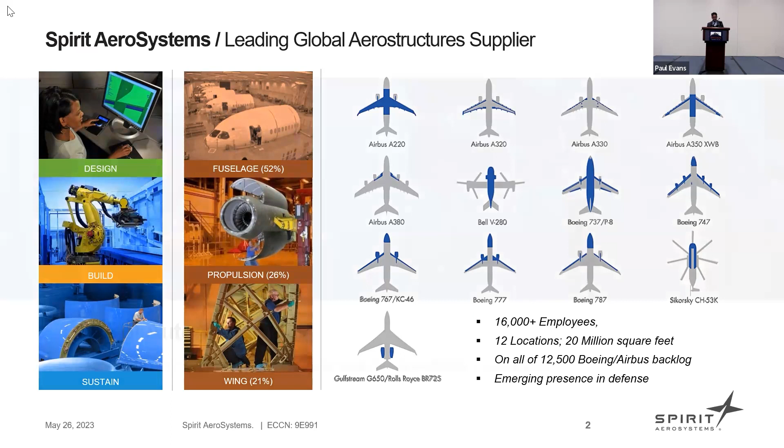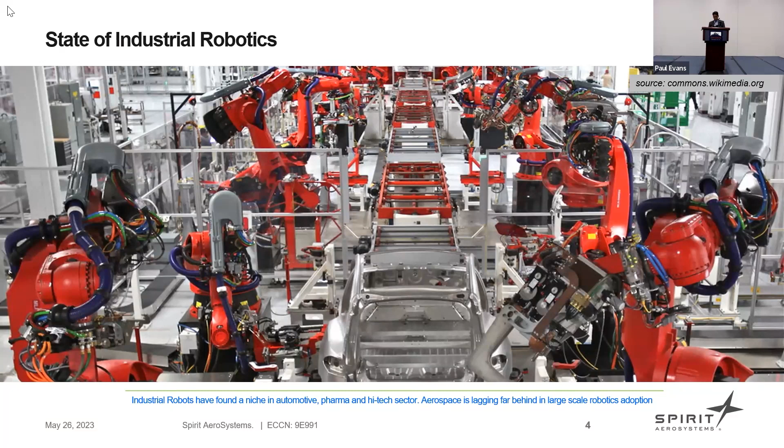So in terms of the state of automation, this is not Spirit. This is, I believe, Tesla. We'd be very happy and content to have our factory floors look like this, but we are not there. If you look at the data in the last 10 years, apparently the robot sales have tripled, and most of the growth has gone into automotive. And in aerospace, we are under the others. And in fact, there's been a negative growth in 2019 and 2020.

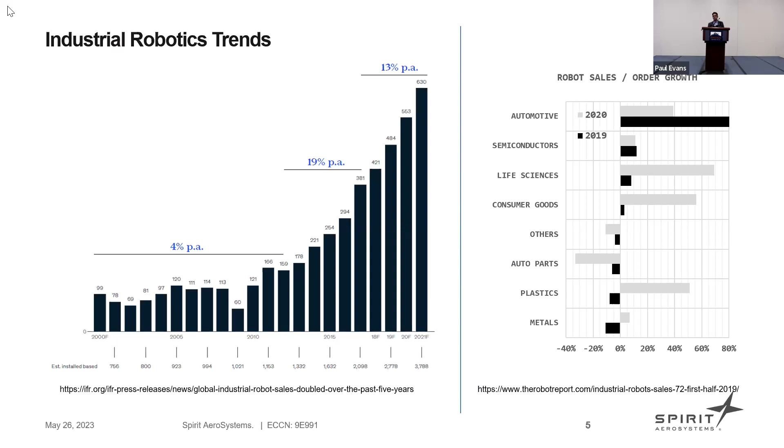So that kind of paints a realistic picture of where we are in terms of automation. And robotics, I think, is kind of a proxy for generally all kinds of automation that we do. If you see these kind of images, you can see that mostly it's all manual operations, and that's what dominates our shop floor.

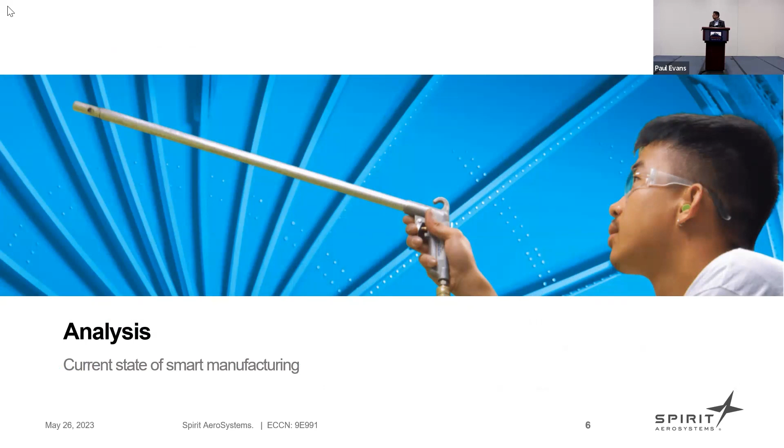We have strong motivation to move and have more automation in our factory floor. For one, we have some unique manufacturing technology and processes, which our competitors cannot replicate. Even sometimes our customers cannot replicate these technologies. We need to be able to continue to retain that leadership. And secondly, coming out of the pandemic, the last 3 years have been really hard on our industry and particularly for our company. So we have very strong motivation to enhance productivity and quality, efficiency all through our factory floor.

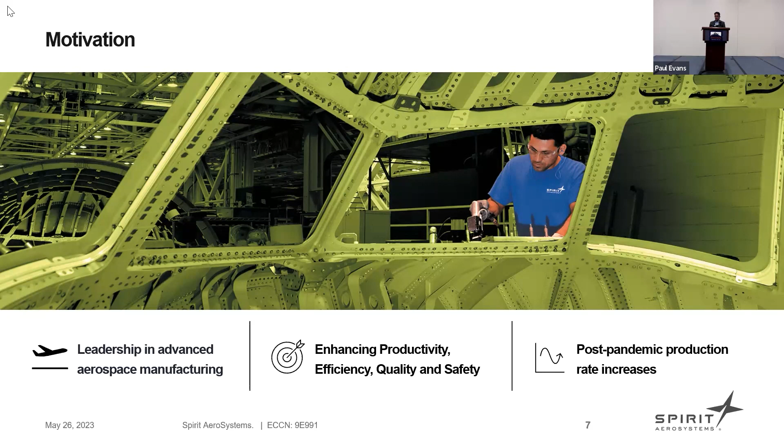And on the other side of things, we are recovering from the challenges of the last 3 years. And now we are looking at growing back to the previous volumes in our production. But not just that, I think we have to exceed that. And pretty soon, in 2 to 3 years, we should be producing more airplanes than we were prior to the pandemic. And I think this time we have to do it differently because we lost some of the capacity that we had during the last 3 years. So automation is really key for us. And I think you heard some of the challenges with Lockheed earlier, similar industry.

So high mix, low volume, it's a big challenge. That's one of the reasons why we cannot justify more automation in our factory floors, because usually we don't have the business case to do that. And then the fragmented ecosystems, I'm sure all of you here are familiar with all the challenges of integrating all these different sensors and robots and working with them. I think we talked about some of it in the workshop today. So those are big challenges, but I think we can work through them. We can't solve the fragmentation problem, but we can design our solutions around it.

And then the third big problem is if you end up designing a solution, and we have done that, you end up with a complex system, and you have the challenge of training your workforce to manage that big complex cell. You need to train your maintenance folks. You need to train the operators to use that. So this becomes a challenge. I think these are big challenges that we see, which are kind of preventing us from going all in on automation.

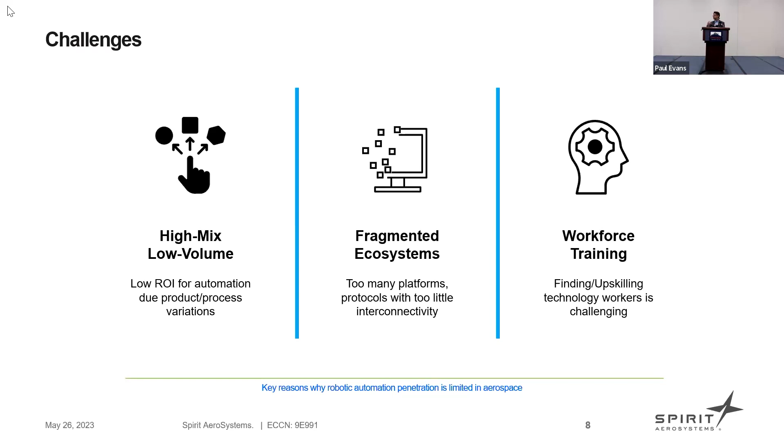And I think one of the important things, we talked about 20 million square feet of space. The scale is of importance. We cannot design point solutions, and we won't ever be able to automate our factory floors like what you saw in the Tesla picture. So in order to get there, whatever we do, we have to do it at scale. And that's what we are attempting to do. So, some deep dive into some of these challenges.

I took an example of one of our first cells that we did. This was an inspection cell. It was in one building, two aircraft, 737 and 767, both are fuselages. And we wanted to develop an inspection cell for fastener head heights.

So we have two fuselages, but each fuselage has a variant. So the CAD is different, the geometry is slightly different, the fastener types are different. So you have all these variations that we have to deal with. And then we started with fasteners, but then quickly we started looking into scratches and dents on the aircraft skin. And that requires different sensors. Some sensors can do multiple jobs. And so we have all this in the mix.

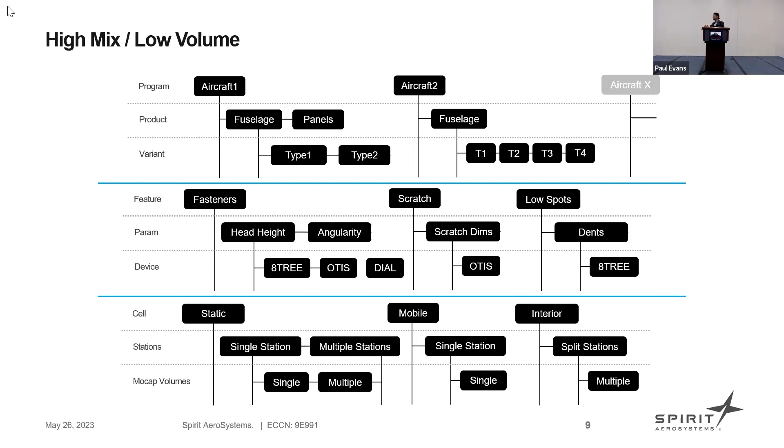And then the challenge is that for 737, we have 14 stations where you need to have the inspection done. On 767, we have 4 stations. So with all this mixed up, whatever application we develop has to satisfy all the conditions. So we have to have one solution which can address all of this, because we don't have a chance to do multiple solutions because of the cost.

In terms of fragmentation, by the end of developing the solution, we ended up with 4 different kinds of sensors. We have motion capture, we have cameras, 3D cameras. We have 3 sensors, one for dents, one for fasteners, one for scratches. And we had to integrate all of this.

And then when we deployed it, based on the feedback from the inspectors and mechanics, the inspectors preferred smart glasses, the heads-up display, because they wanted their hands to be free when they're scanning. And then the mechanics who went in to fix the fasteners, they wanted cell phones. They just went around the airplane looking at cell phones. You'll see some of these videos a little later.

So we ended up having multiple ways to deploy these applications. So we had cell phones, smart glasses, tablets, and a large touch screen. So we had to deal with all of this. The challenge here is that we can do this one time, but we need to be able to scale this, not just in one building. We do this kind of inspection across multiple aircraft programs. So we need to be able to replicate this.

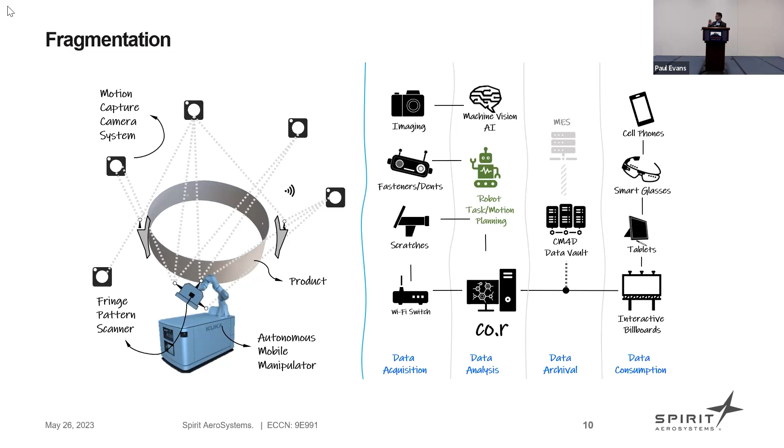So given all that, we came up with this framework called cognitive robotics. At bottom, it's nothing but a set of ROS libraries that we use. And at this point, we have to thank SwRI, ROS-Industrial, for getting Spirit started on this journey. They deployed one of the first ROS-based cells way back in 2015, 16, before my time at Spirit. And Spirit was really ahead of its time in deploying this kind of an advanced perception-based, ROS-based production cell for painting. So we continued that journey, and we wanted to look at how we scale that, because that was one cell, but we wanted to do multiple cells.

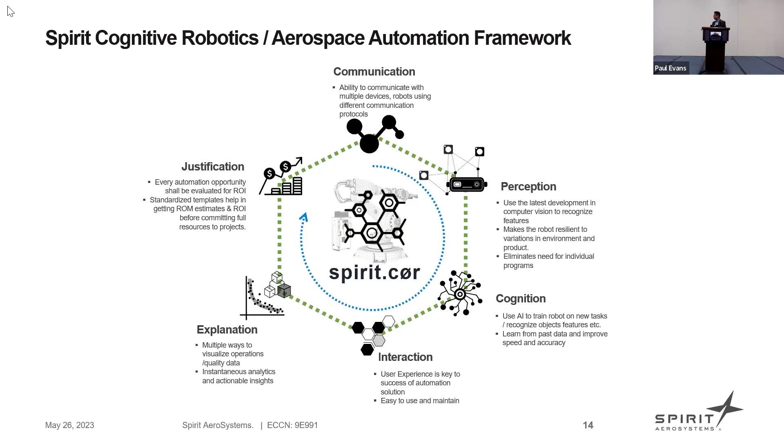So what we are trying to do here is put a strategy around how we develop these modules that we can scale to multiple cells, multiple solutions. Even if it's an inspection application, how do we change parts, change from Boeing programs to Airbus programs, and so on. So this is just the way we think in terms of how we structured our framework.

Communication, it's all ROS. We've settled on it. Any sensor that we have to integrate, if we're lucky, we have drivers. If not, we build our own drivers. Some of the sensors that I was talking about are highly specialized inspection equipment. So they don't even know what ROS is. So we need to build those bridges and then get them onto our platform.

So that's one. And then, as I said, sensors, we have all kinds of different sensors we've been using. Today, we have a library. We made it so simple to integrate new devices into our library that we have a template.

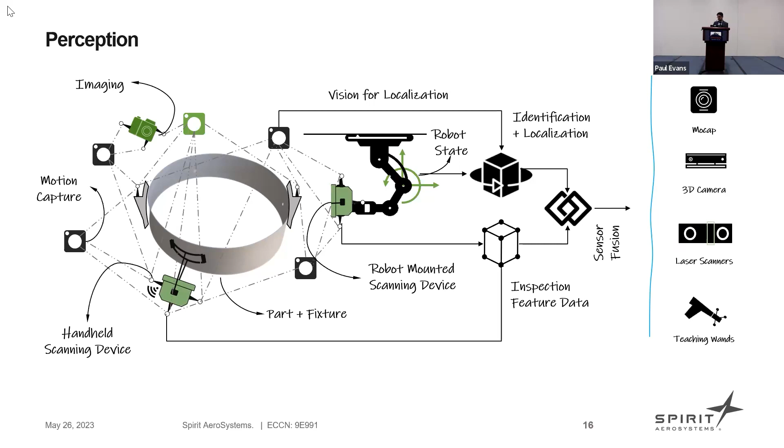So you have a new device. I mean, it requires a bit of work to develop the drivers, but there is a common framework, common message structures that we can use. So that makes it easy to swap things out. If you don't like a certain 3D camera, we can swap it out with other OEMs. So again, that's something that we have built those templates.

And most often we use perception to translate it to some kind of a useful task for the robot. So we have different kinds of applications. Again, within a very narrow aerospace manufacturing domain, we have drilling, sealing, scanning, sanding, imaging kind of applications. So we needed a common messaging format, common data structures to work across these different applications.

So we developed these tools. This is the common data structure across all these applications. We have tested it, and we've been successful in using this. We translate the information that we get from these sensors to these tasks, which we can feed to the robot. And I'll show you different examples of different kinds of robotic applications which use all the same framework, same modules, same data structures to do that.

And one of the key parts of developing an autonomous system is the ability for the robot to make its decisions and make it autonomous. We heard some important information about behavior trees. Looks like that's really popular. I mean, of course, we use control logic, state machines, but they don't really scale well. Behavior trees seem to be really popular.

I did try looking into behavior trees, but I found the symbolic AI tools, like there is a paper called STRIPS back in the 1970s from Stanford. Not sure why that is not more popular than behavior trees, but it's a really simple architecture. So what we use is based on actions. If you have an action, the action has certain prerequisites and it has a certain effect. And that's all you need to know.

But I think probably it's all moot now. I think in 2 years, probably we'll be looking at large language models trying to do this for us. We already heard that MoveIt is trying to do this.

So in terms of interaction, this is really critical for us. One of the challenges of these complex robotics applications is the end user. We can't expect to have engineers operate these cells. We don't have a business case to justify that. We need to have mechanics, the same mechanic who's using his manual inspection processes, to use this instead.

So when we deploy this, we can't have a lot of training and education for those operators. So it has to be really simple for them to use. One of the ways we measure success is by the amount of time the operator spends in front of the computer. So we need to minimize that as much as possible.

And the way we try to do that is give them a very user-friendly interface, something that they like to use and they don't complain a lot about. And they even wanted light theme, dark theme, so we gave them that. So I think it's really critical for them to like this, for them to use it and give good feedback to their managers so that this will see a long life on the shop floor.

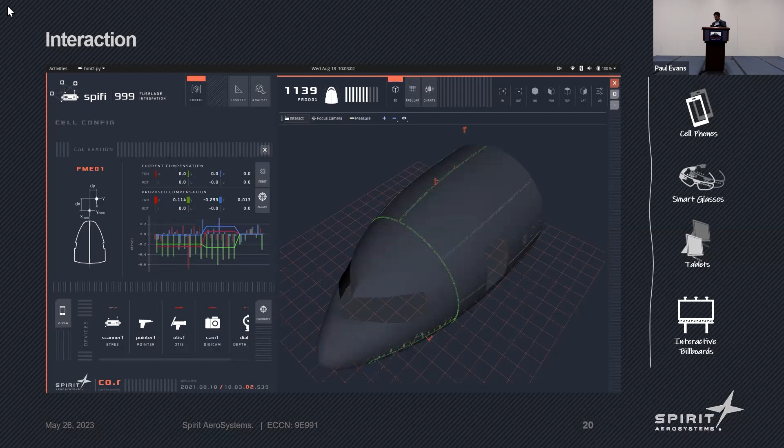So the next level of challenge is, once we convince the mechanics, we need to convince their bosses that there is value in deploying these. And that's why we have all this charting ability, so that the managers get some value out of these tools. So these charting libraries are common across all our applications.

And the whole HMI that you see here, we have multiple applications that use the same HMI. It was really challenging to achieve that, but we've been able to modularize our applications, whether with a robot or without a robot. We have the same HMI working across different applications.

So we have all the charting abilities which can work across various applications. The data structures are common. You can configure these charts in a config file, and then you'll be good to go on a new application.

And the last set of people we have to convince that these solutions are useful, which is kind of easy in a way because we can just show by numbers, is our finance teams. What we have done is we have developed Excel templates for each cell that we develop. We have an Excel template for calculating ROI and payback periods.

So even before we start proposing or designing a new cell, we start collecting some information about the CAD, the kind of part that we work with, and then we use that to build this information, looking at the current effort being spent, the labor effort, the current state, and then the new investment in terms of capital and recurring investments. So we build this, and then this Excel template throws up all the numbers that the finance team is interested in.

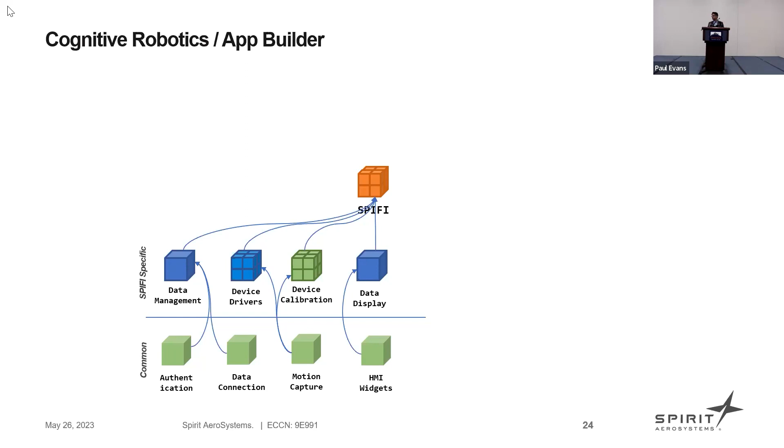We can inspect fasteners, dents, scratches. We have about 7 or 8 different devices that we use, and we combine all this data that we can consume. But this is an application by itself. So when we decide to deploy this, for example in this case the 767 airplane, we need to configure this to work with a particular product, particular airplane, particular standards. Most of the work at this level is config files. We don't do any more coding at this level. So we deploy this application.

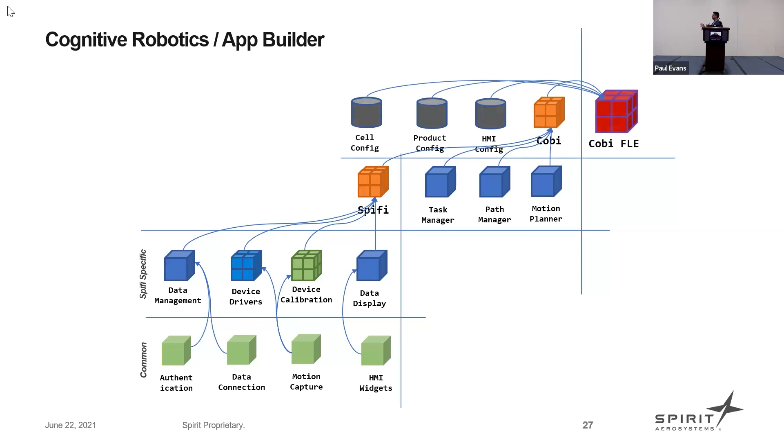We had a situation where we needed to morph this manual inspection cell, which was ROS-based, into a robotic cell. So then we go and add those packages. We use 100% of what we developed for SPIFI, and then we develop this new app with the robot. Again, we configure that to work in a particular cell. FLE is fixed leading edge. So that's how we do it.

So at least on inspection cells, we have gotten to a point where we have promised our end customers, the operations folks, that if you give us the requirements in terms of CAD files and engineering drawings, we'll get back to you with the software completely configured in 3 weeks. The hardware is the long lead time item. Outside of that, we can deploy a new cell in terms of software and configuration in 3 weeks.

And we have shown that. Actually, it takes 2 days to get all the configurations done. Most of those 3 weeks will be chasing all these files and figuring out what's the latest. That's where we spend most of the time. So it is possible to get there.

So just not all talks. I think we have the 737, 767 application that we talked about. It's live. On the 737 cell, we have one of the world's largest motion capture setups with 260 cameras looking at 14 different stations. And we have this inspection cell. I think you'll see the video and probably get an idea of what we do.

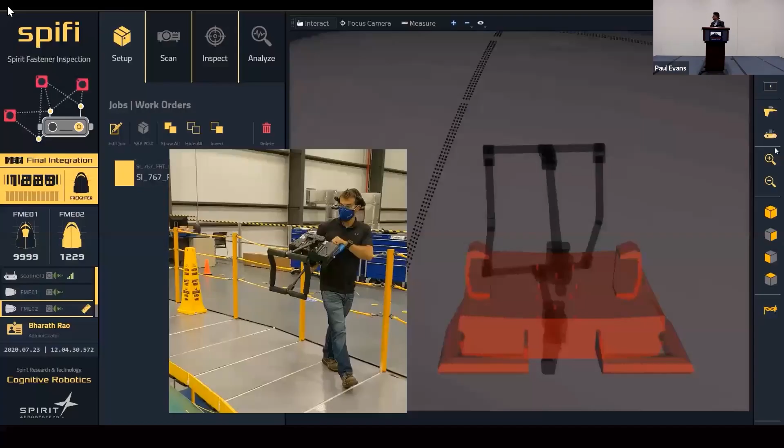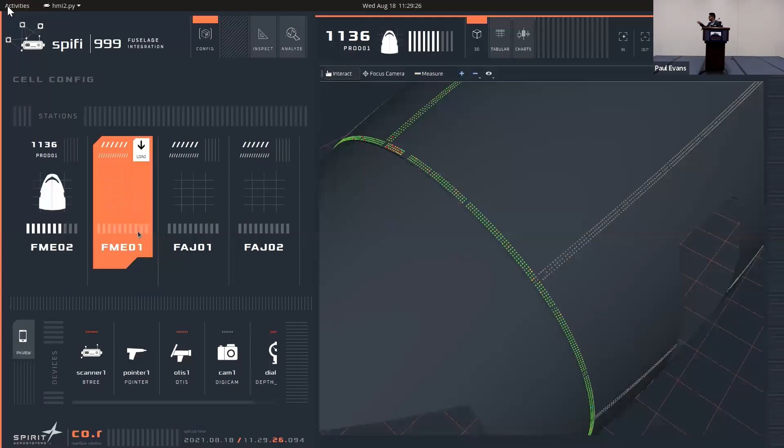So it's called SPIFI, stands for Spirit Fastener Inspection. So that's one of the devices. And there's a heads-up display. The operator looks at it. So it's being tracked by the motion capture cameras. And then this is the software interface the end user sees. Actually, there are only 3 button taps to load a new line unit. Everything else is optional. The mechanic just has to spend 10 seconds in front of the screen and then take the scanner and go.

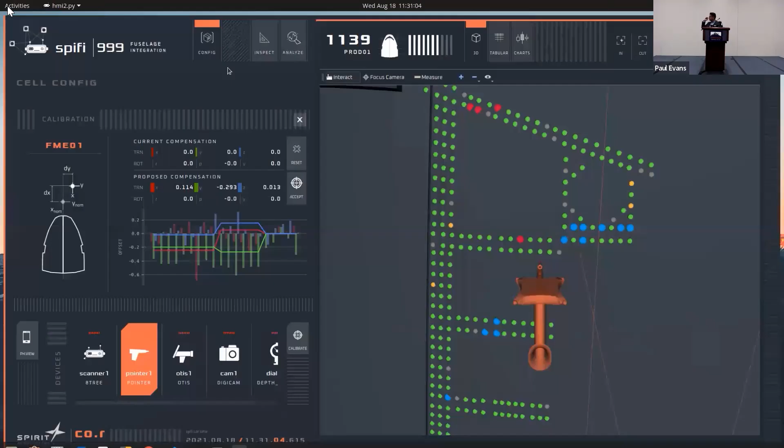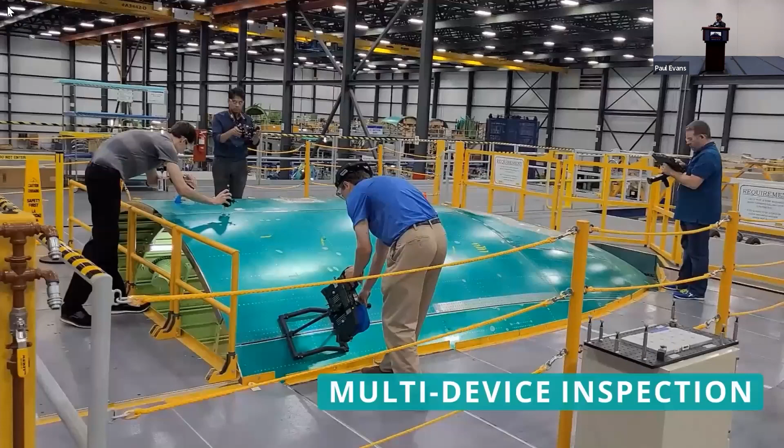And this is what I was talking about. This is a mobile phone interface. The same thing here, working on mobile phone. The window that you see is RViz. So this one here is an example of using the same platform. So one of our leaders wanted us to do images instead of doing fastener head heights; they wanted to capture images and stick them on the fuselage. So we got this done in 2 weeks. In 2 weeks, we were able to use all these modular libraries, just that part where we replace fasteners with images. We were able to do that because of this framework that we have.

And here we have multiple devices, actually 4 devices in the scene. Actually, there are 2 more that we can use on the cell, where we can use these devices simultaneously and then collect all this information, and it gets aggregated in our reporting tool.

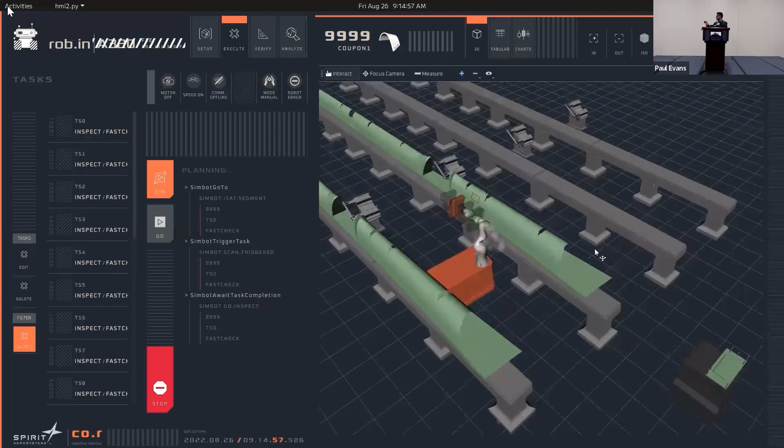So Robin stands for robotic inspection. So this is SPIFI, but with the robot. This is under development. We have done some testing. Next year, it's going to be deployed in production. There are a couple of applications that we're looking at. This is a large fixed leading edge on one of our commercial aircraft. So this is going to be one robot servicing 8 stations. You see 4 here. And it's a KUKA robot.

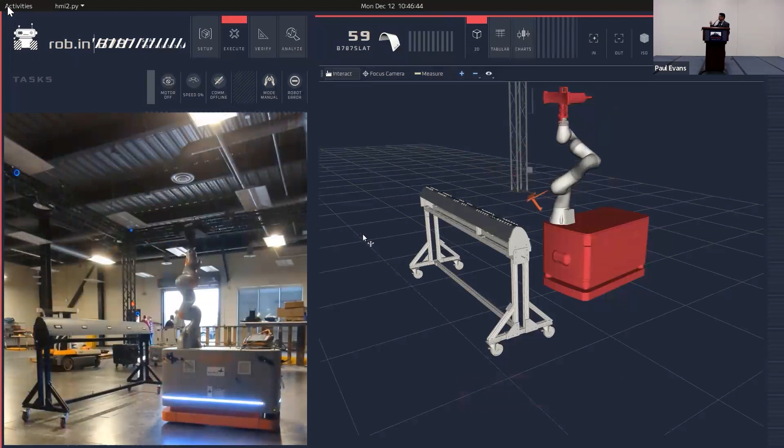So with this special scanner, it can go around the cell, and it is completely autonomous. At least that's what we're targeting. We probably would have 2 robots, one doing fasteners and dents, the other one doing scratches. So it can go around, plan, and then go on the cell, do it in night shift, lights-out automation, and then get the results.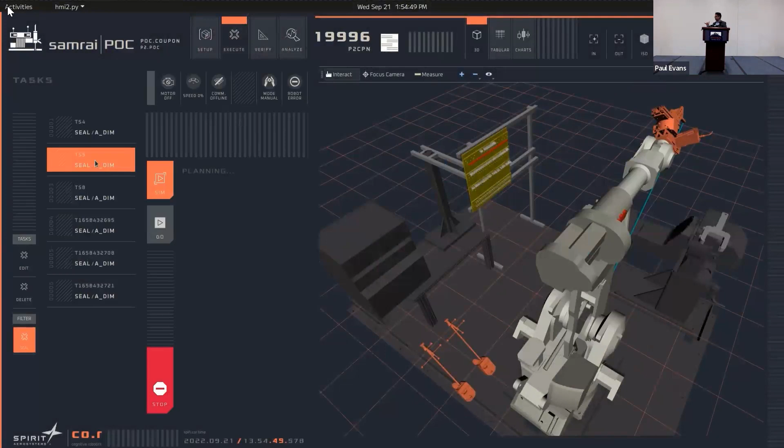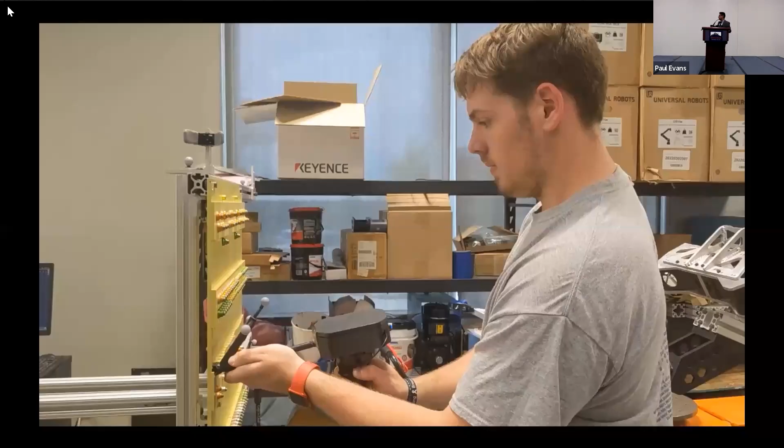We were testing our technology on a coupon. This year, we're going to be doing this on a large wing panel, which is probably as big as this room. So it's a really big panel. And again, we are moving away from offline programming. So we program the robot by teaching it. We use motion capture to teach the robot where to seal. And you see the seams are being captured from the motion capture. And the robot plans itself and then goes and seals.

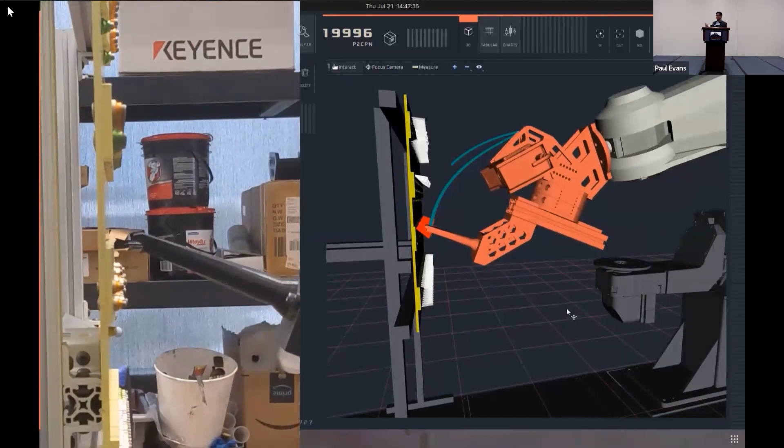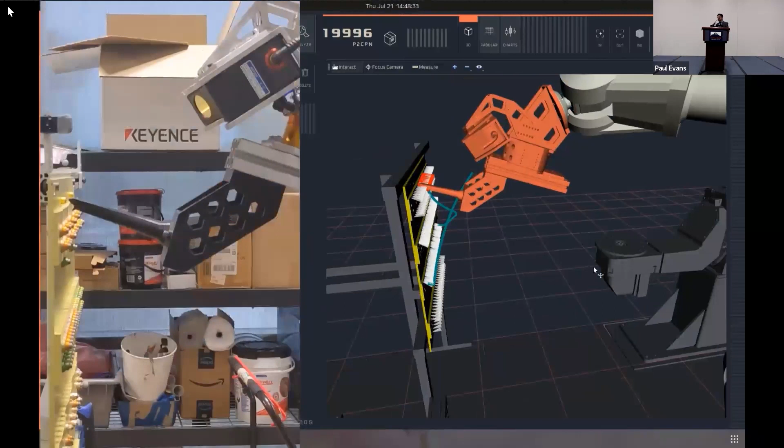So there are 2 layers of control. So there are 2 lasers. The seam tracking is being done using the lasers. And all the other part, which you saw, is outside of that. And what you see in the scrolling text is the action graph that we talked about earlier. It's planning in real time, and then executing all these actions.

So we have gotten to a point where we are making use of these technologies in production. We are finding some really useful, actionable insights. Just one example from the SPIFFY application: there was a pattern of defects, non-conformances in the airplane, which we saw for 2 or 3 airplanes. And this was able to pinpoint where things started going wrong, on what line unit, what the issue was, and which zone had the issue.

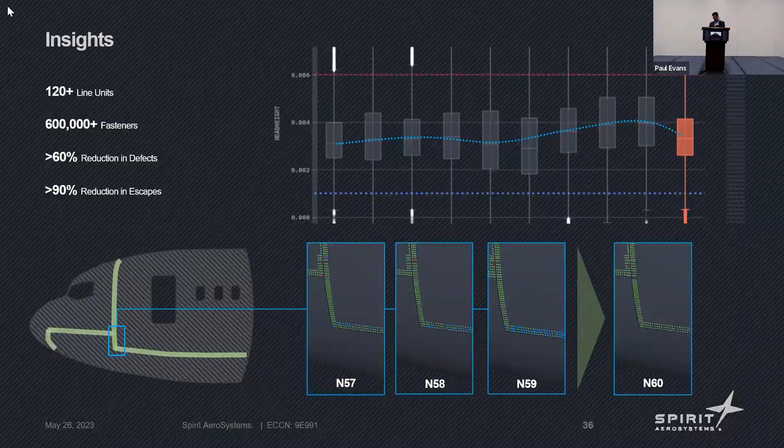And then we were able to track it down, do the root cause analysis, and then fix those issues. And that's how we are using it. And we have a lot of such examples. And that's why I was talking about the analytics library.

Across all the applications that you just saw, and a few more, we collect all this information. It's available to the end user if they want to look at it. We have all this charting. Typically it's not the mechanics or inspectors who look at this, it's the managers who have to justify the root causes and see how to address them. All of this is available on all our applications. All we need to do is have the same database structure, configure that in our config files, and all these charts are ready to use from the get-go.

And we can do all this correlation analysis. So all of this is part of our library, and we have spent time developing this one time. We don't spend any more time on this, we just do config files.

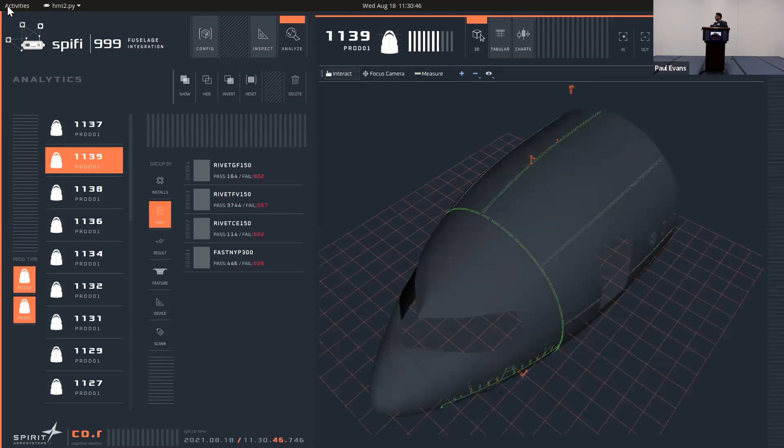So where we are today, you saw four applications. We have more, some in the pipeline. More importantly, once these applications are mature, we plan to deploy them in multiple locations. We started out with the challenges of scale, and that's what we're trying to solve. A lot of people here come up with wonderful solutions, but how do we scale this across 20 million square feet of shop floor? That's what we're hoping to achieve, and so far it's looking good, especially on the inspection side.

I think we are doing okay. We have lots of ideas for where we can use this in logistics, asset tracking, different automations. We have all these different themes going on, and the vision is to use these kinds of technologies. There are lots of challenges, but the vision is to do this at a part level, a system level, an assembly level, integrate all of this information, and get a bird's eye view of all of our processes and quality metrics across the organization, at least for one product.

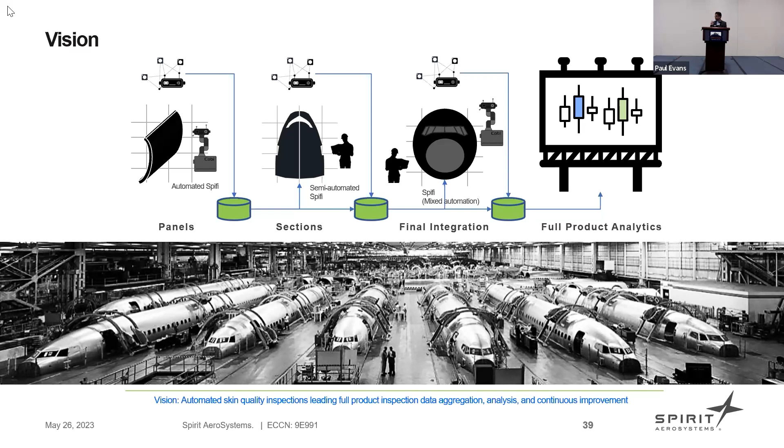I didn't talk about the cybersecurity challenges that we have. It's a big challenge, we haven't found a solution yet. We are an aerospace company, we have a defense portfolio, so it's really challenging to deploy these applications in production. We have done this because of some special considerations on each of the cells, but that's something we have not talked about. That is something we are still working on. So that's where we are.